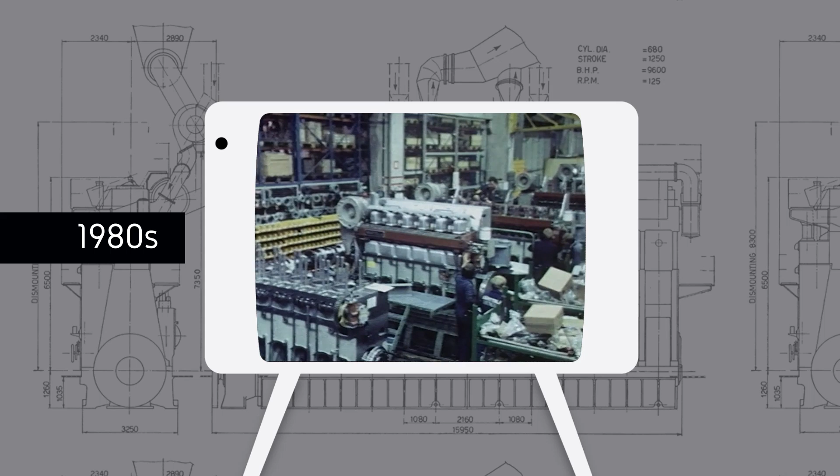In 1981, engine building and engine applications are still local, not global. There are more than 30 large engine builders. Liquefied natural gas carriers have steam turbines, and coal, nuclear and hydro still dominate power generation. Despite fierce competition from the Far East, shipbuilding still takes place in Europe.

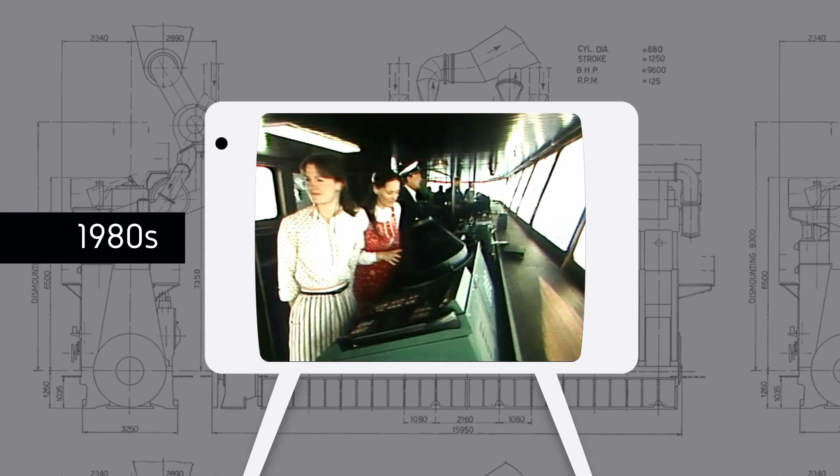But how many delegates at Helsinki 1981 could imagine the dramatic changes of the next decades? In 1981, engine and component developers were still adapting to HFO. The development focus was fuel economy, but papers at the 1980s congresses herald the themes of the 2000s.

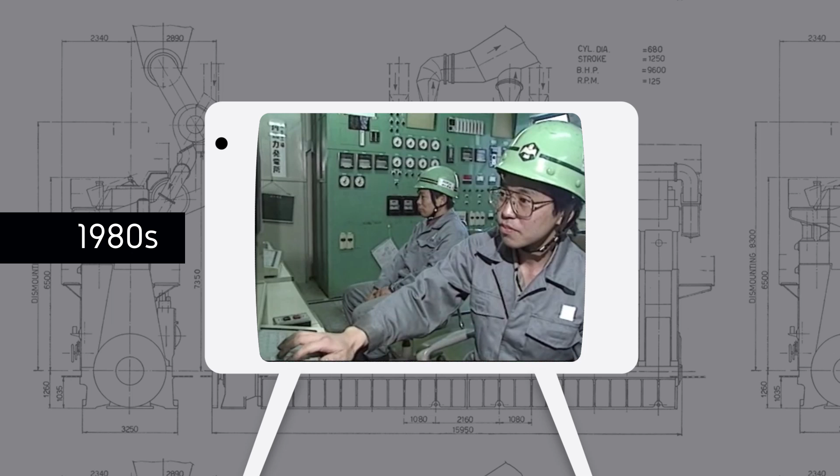While interest in gas engines starts to grow both on land and sea, and two giants are awakening. The first engines with electronic control emerge, and China becomes everybody's favorite market for generator sets.

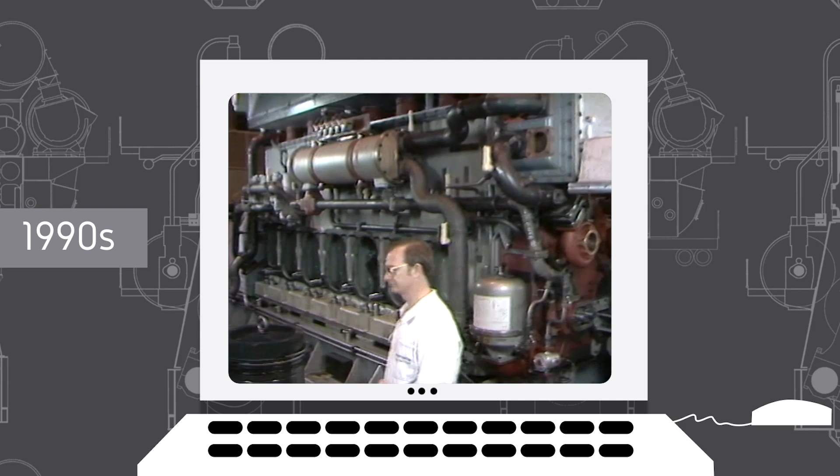Industry concentration and globalization begin, and first emissions legislation for heavy-duty engines arrives. In the 1990s, the large engine industry stands before its greatest challenges and answers with the greatest acquisition of knowledge in its history.

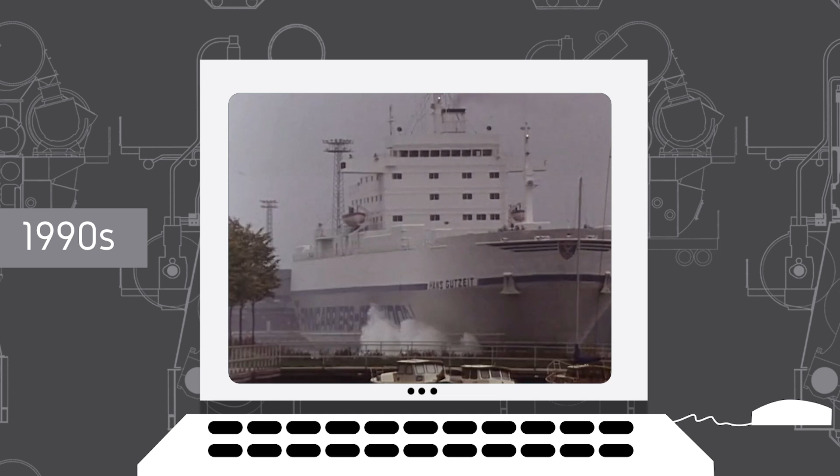Emissions are in the regulator's sights. What starts with cars and trucks soon extends off-highway and to boats and ships. The writing is on the wall, and CIMAC founds working groups for noise, automation and monitoring, exhaust emissions control and users.

Engine development requires critical mass, and serving shipbuilders in another hemisphere requires worldwide presence. Industry concentration results in a handful of global manufacturers.

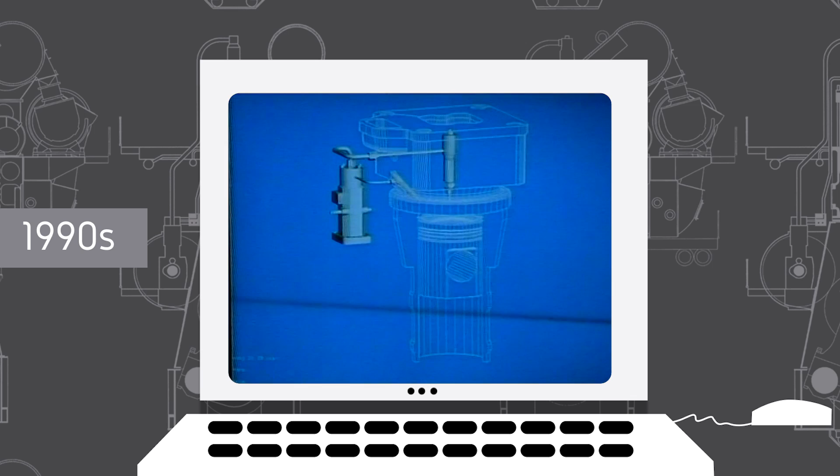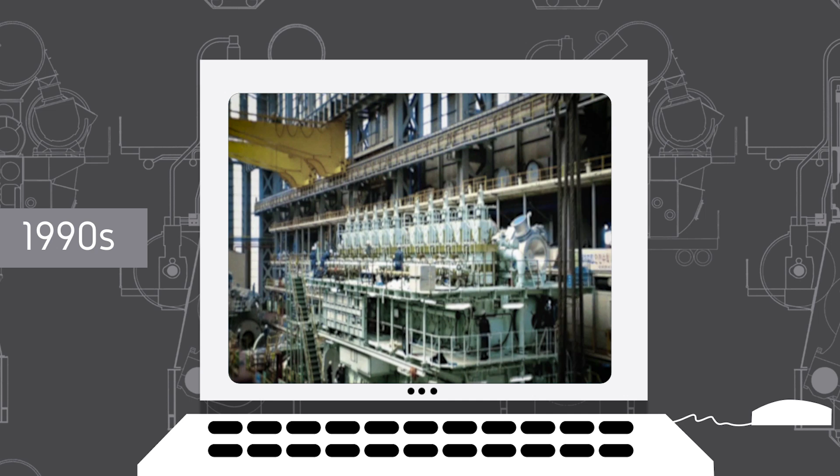Electronic controls are now robust enough for large engines, while computer development tools revolutionize engine development. The electronic revolution reaches marine and industrial engines. At the end of the decade, a two-stroke diesel achieves specific fuel consumption below 160 grams per kilowatt hour.

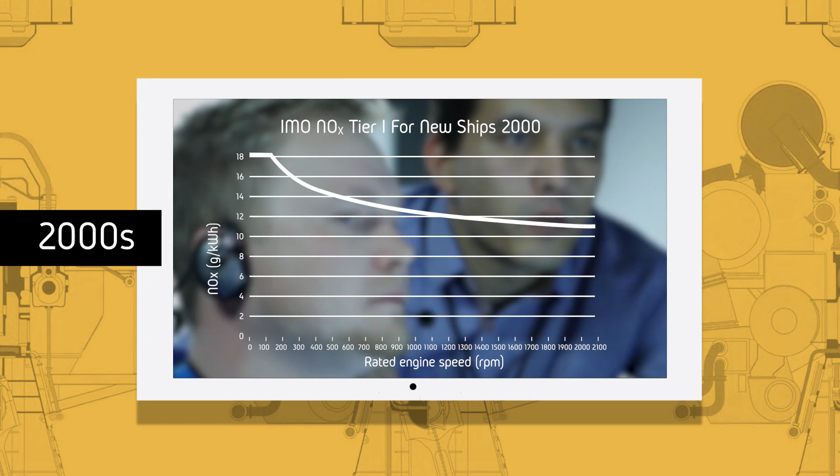What started in the 1990s continues and accelerates, especially emissions reduction. The new millennium sees the focus of engines R&D change forever. While world trade booms, the biggest problem is delivering engines as demand peaks.

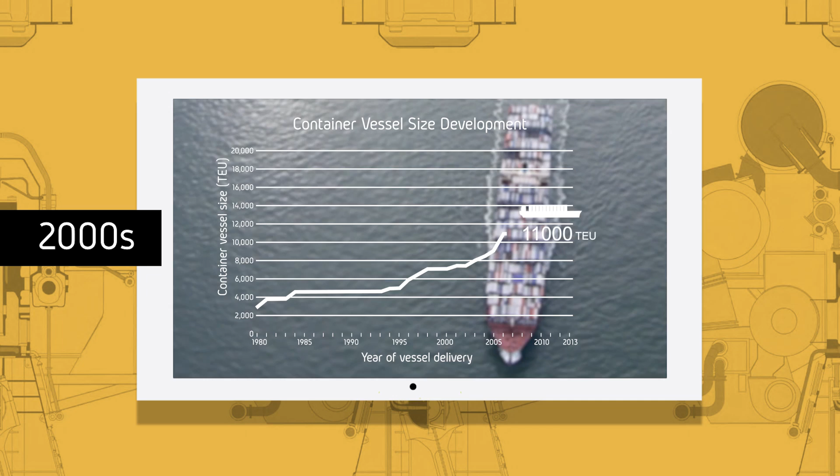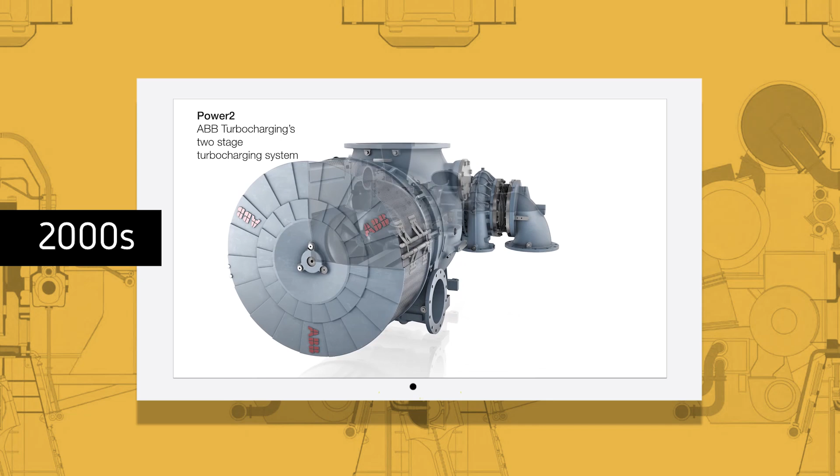Engine power breaks the 100,000 horsepower barrier as each new container ship sets a new record. To unlock the emissions, efficiency and power potential of large marine engines, the EU sponsors the Hercules Joint Industry Project.

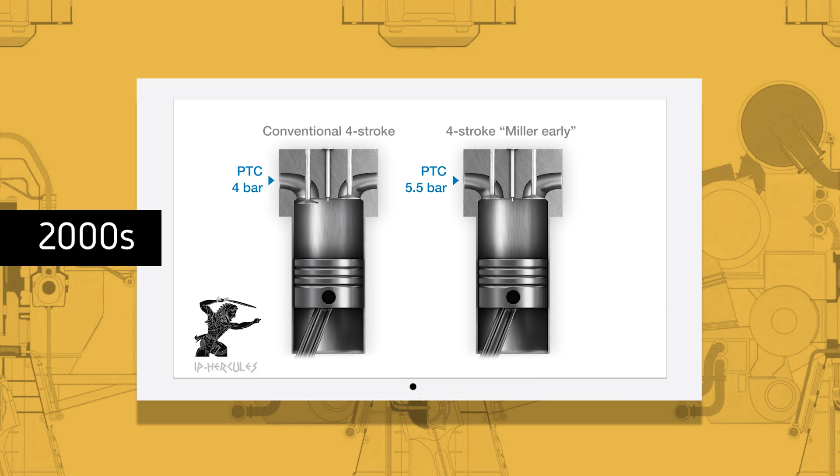Almost forgotten names return as emissions legislation tightens. Fuel consumption penalties are no longer acceptable as greenhouse gas awareness grows. China continues to grow, first as a market and then as a producer of vehicles, ships and engines.

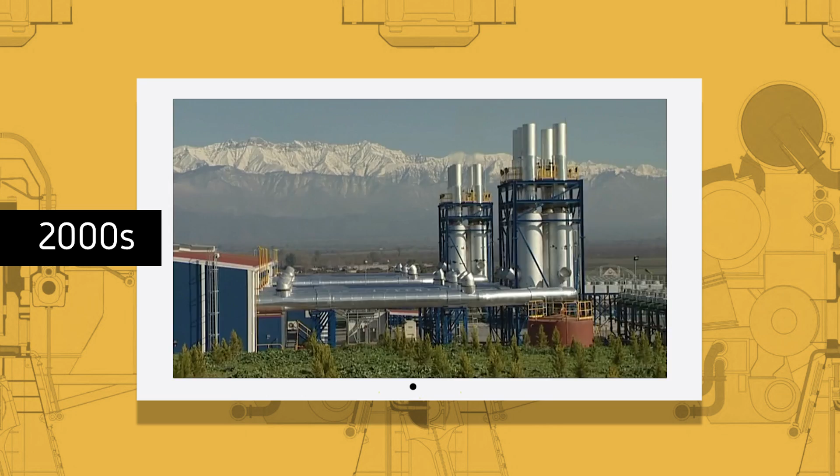Overnight, boom turns to bust. But as the 2000s progress, technologies emerge that can only be realized with electronics, and they promise vast improvements in emissions, fuel consumption and power density.

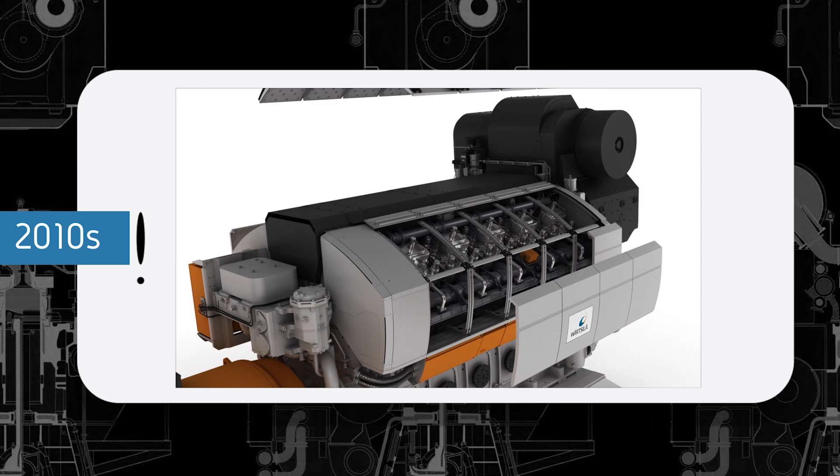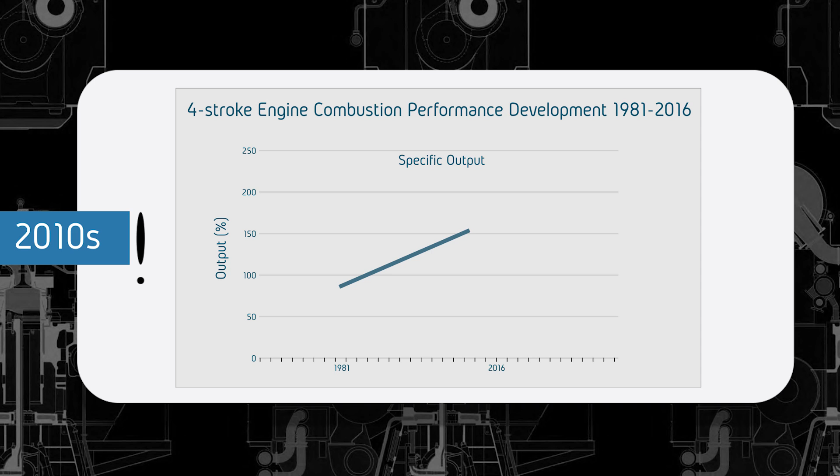Over 100 years after its launch, the diesel engine still offers the best combination of efficiency, torque and load acceptance. And gas engines are making great advances. As we see with Miller, engine technology can still make quantum leaps.

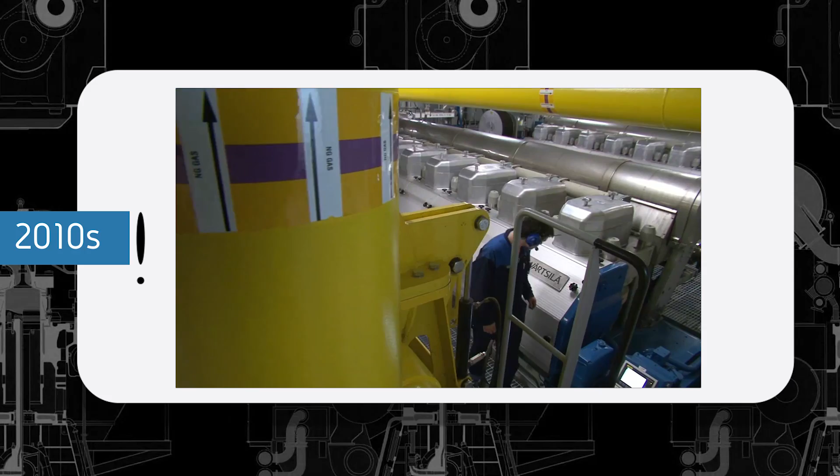The decade opens with IMO Tier 2 and Tier 3 at its midpoint. Gas starts to challenge oil's domination, adding financial incentives to emissions benefits. Finland plays a major role in this dash for gas.

IMO adds the Energy Efficiency Design Index and Ship Energy Efficiency Management Plan to Tier 3. CIMAC responds with working group system integration.

IMO Tier 3 is delayed, with some nations objecting to the timescale. A compromise is reached, but engine builders and their suppliers are shaken.

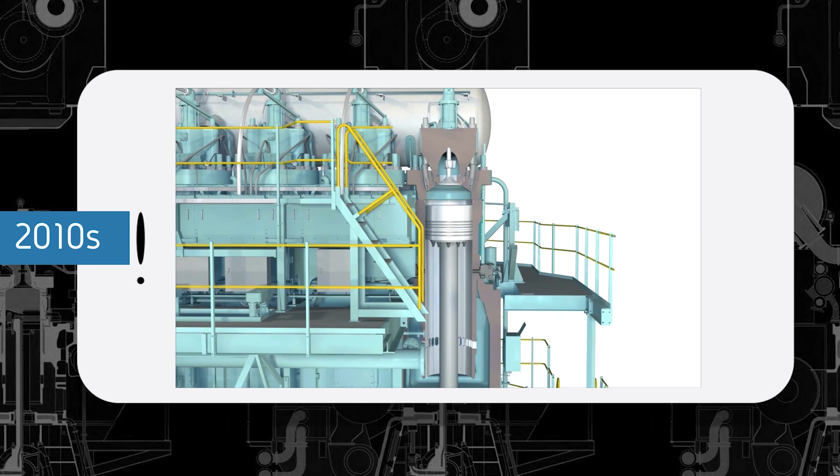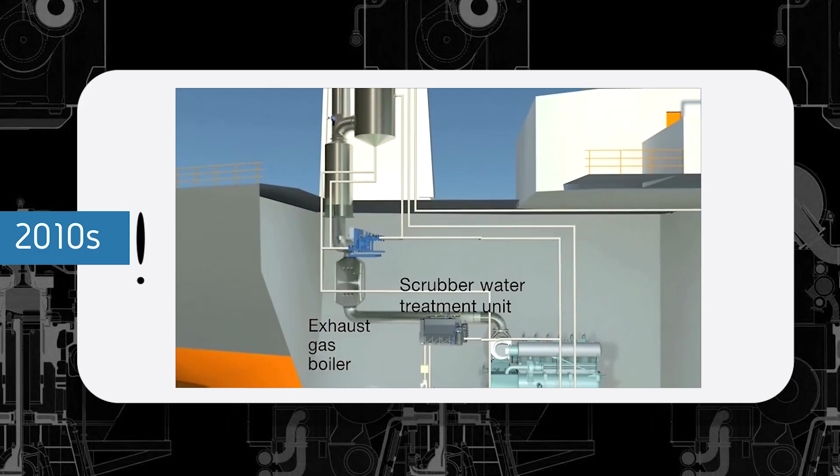Gas engines, EGR, SCR and scrubbers emerge as the diesel emissions technologies of choice, although after-treatment needs consumables and more space. The final decade on our journey starts with gas engines setting efficiency records.

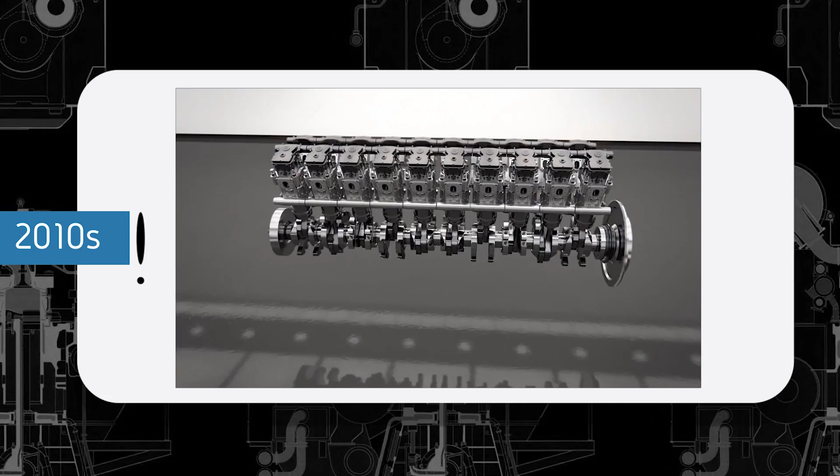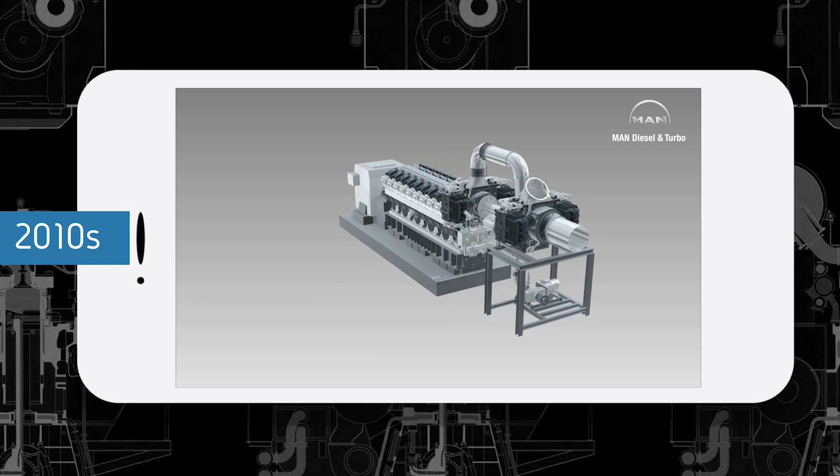At its midpoint, 4-stroke diesels with modular design, common rail, 2-stage turbocharging and Miller cycle set record efficiencies, power density and huge NOx reduction. These quantum leaps are only the start.

The years since Helsinki 1981 have produced a lean industry making efficient engines that are clean, powerful, long-lived and can run on many fuels. Above all, thanks to CIMAC, the large engine industry is more than ever a forward-thinking partner of progress and has a leading role in a holistic approach to greenhouse gas and noxious emissions.

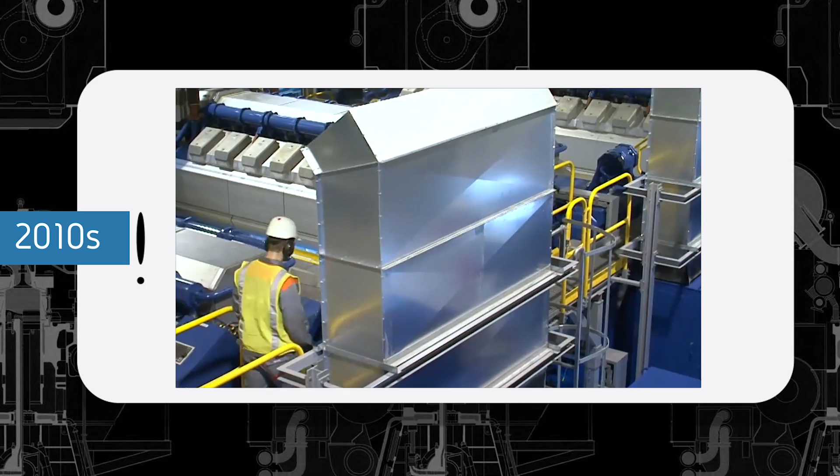The renewable revolution can rely on fast-reacting clean engines as backup for electricity that depends on the weather. On land and sea, hybrid technology promises huge gains through downsizing and energy storage. CIMAC's new working group, System Integration, looks set to be its most vital.

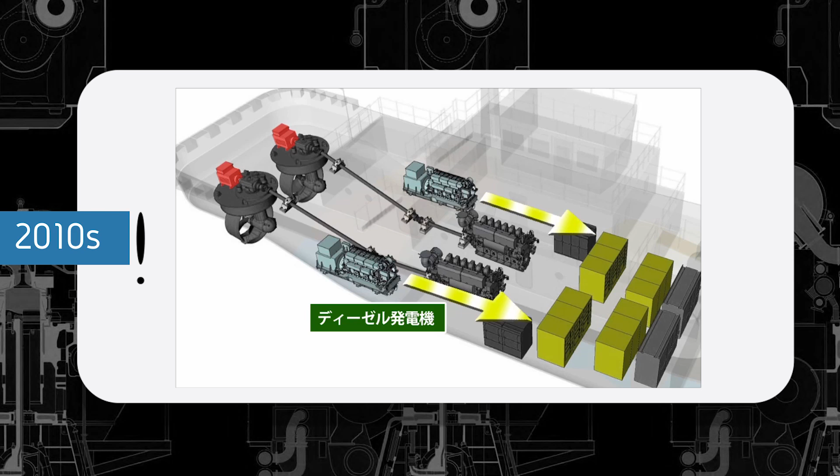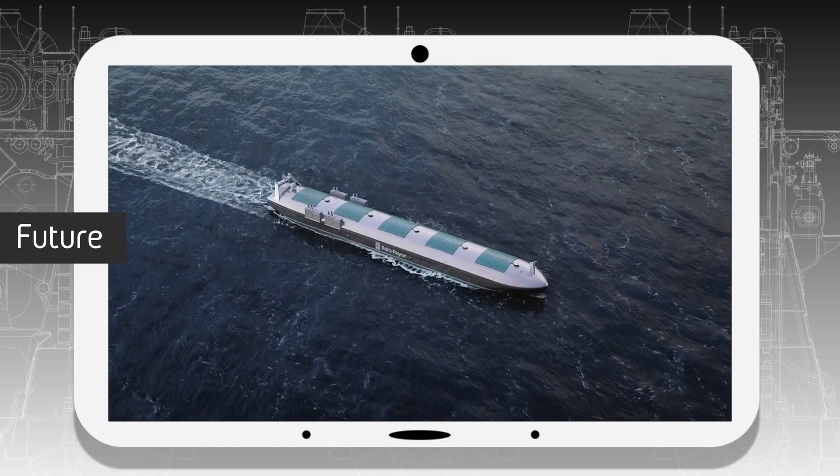Digitalization will continue. What started with fuel injection now encompasses whole power systems. Autonomous vehicles and vessels are reality. Developers use an array of CAD tools.

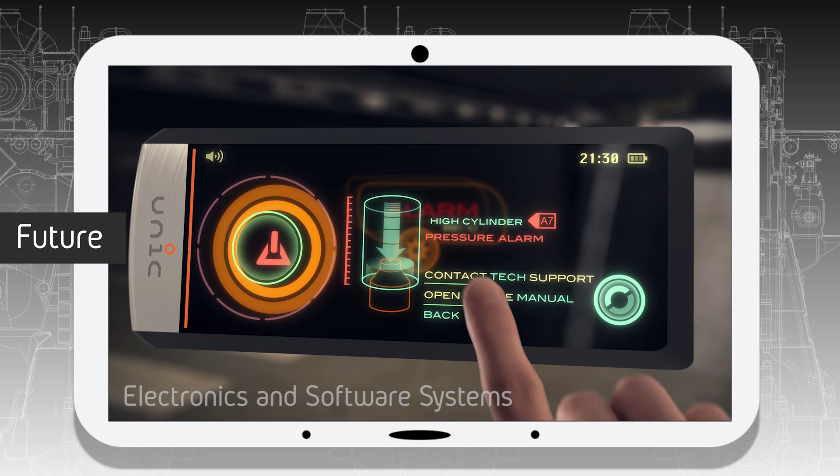Sophisticated parts can be 3D printed. Remote monitoring gives insights to improve maintenance and enable engines to cope with every real-life situation. The CIMAC working group, Electronics and Software Systems, becomes Control and Automation.

As CIMAC meets again in Helsinki, the large engine industry is more than ever a vital foundation stone of sustainable power for a developing world.